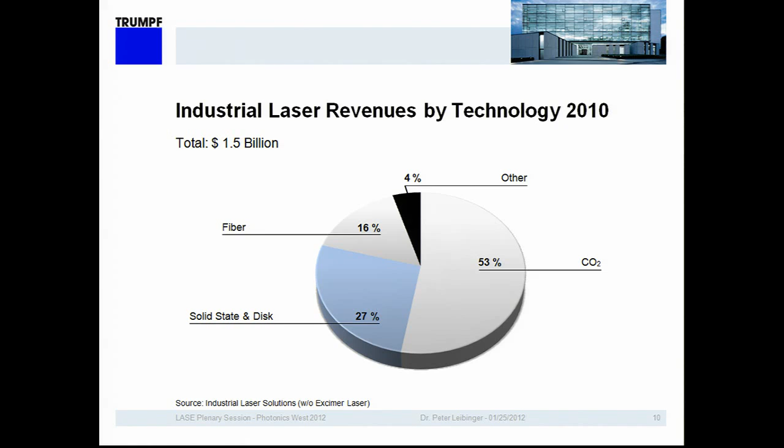In these clusters, semi, micro, and other, we find applications like thin film solar cell scribing, wafer cutting, matrix lead frame cutting, microlithography, cutting of hardened glass, stent cutting, to name just a few.

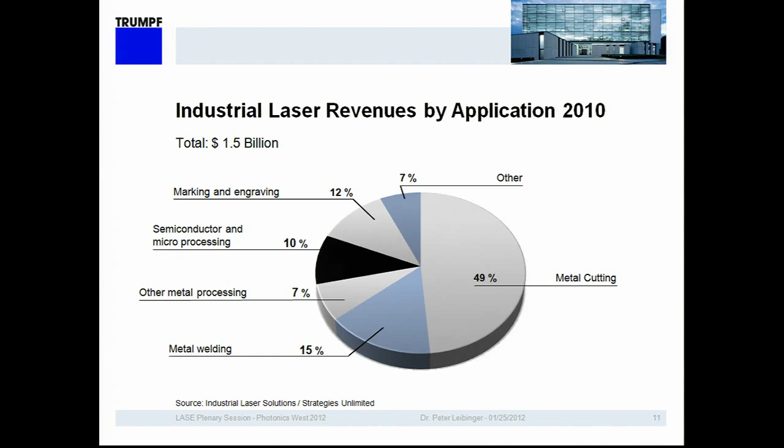Each of these applications demands its own laser source with vastly different specifications and application development. I've tried to cluster a few of those applications to give examples of the parts being made, to generate a better understanding of the breadth of the applications I'm talking about.

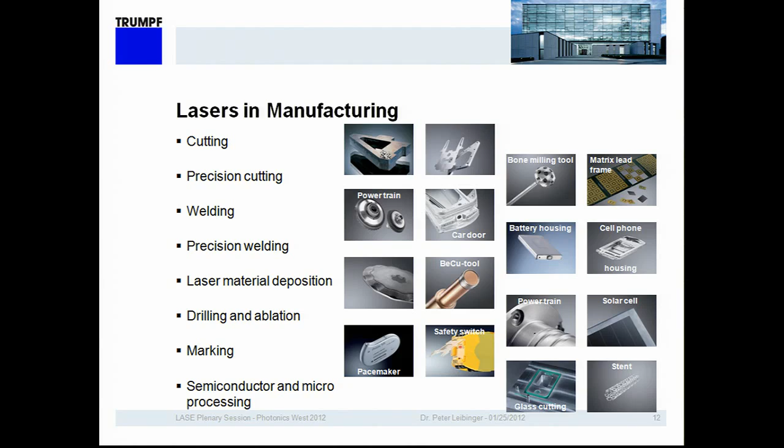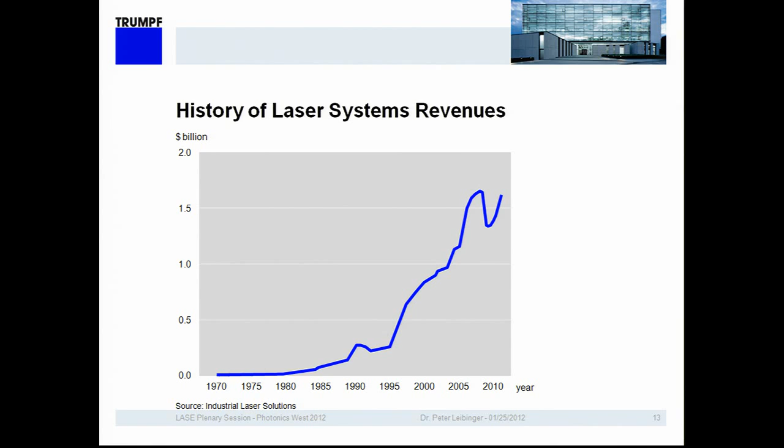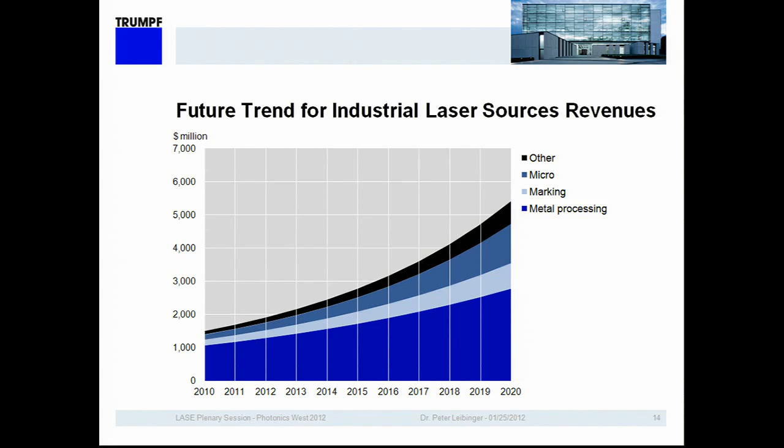However, the major growth driver of the past, which was laser cutting, probably will not be in that role in the future. I think that micro applications, or other applications, will get into the role of being the growth driver, simply because there are new laser sources available today that were not available in the past, and they are driving new applications.

From the aforementioned breadth of applications addressed by industrial lasers derives a set of necessary laser characteristics. I have clustered these and named them capability, reliability, and cost. Capability, such as laser power, beam quality, wavelength, pulse length, and pulse shape, have to be delivered reliably to ensure productivity and robustness of the systems and the process itself. Thirdly, costs such as investment, running cost, and the ability to integrate the laser source into a laser system play an important role.

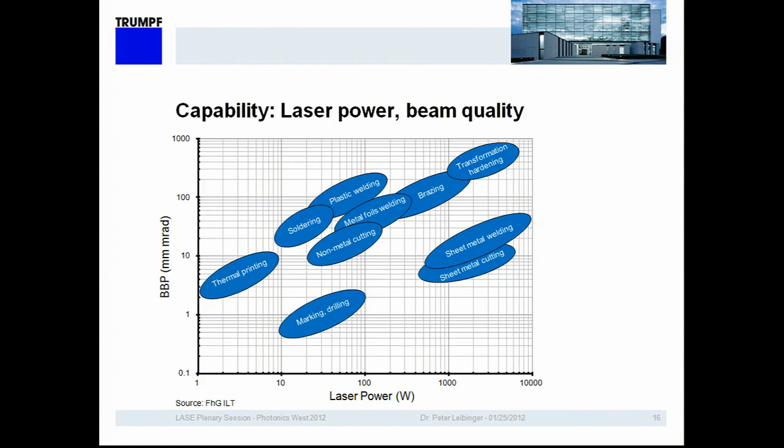Currently, there's a heated debate going on in the market about whether 1 micron or 10 micron wavelength is more suitable for cutting metals. In other words, whether the CO2 laser or the diode pumped laser can do a better job. Looking at the impact of the wavelength more closely, it becomes obvious that this laser attribute does have a major impact on the application itself.

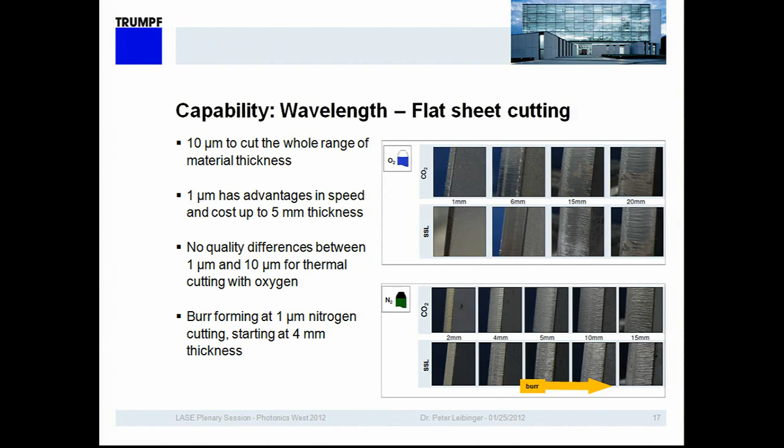We're seeing that on one hand, going to the shorter wavelength, the productivity of the process increases in light gauge material. However, the flexibility and robustness of the process with the shorter wavelength is worse, because you are no longer able to cut thick material in a burr-free way. Comparing the two wavelengths in stainless steel, this can easily be seen.

Cost is another characteristic we need to consider in this example. The running cost of the diode pumped laser is theoretically lower because of its higher efficiency. However, the investment for an equivalent CO2 laser is substantially lower, with CO2 lasers today reaching $30 per watt of laser power, which is much less than a comparable diode pumped laser.

Obviously, with this example, the answer that one single technology can do the job is no.

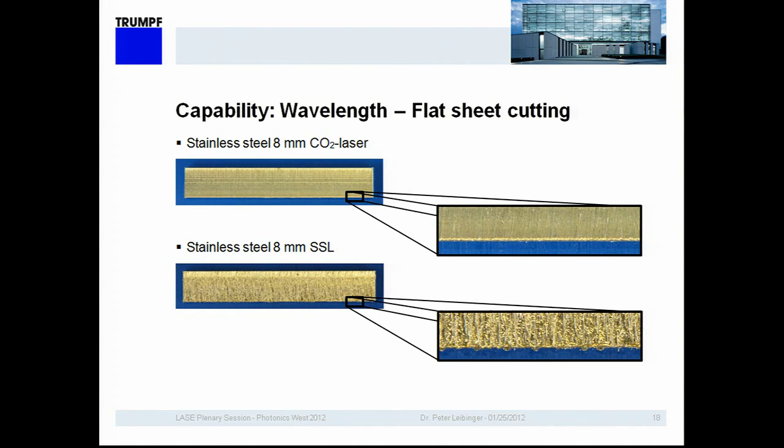Using the same approach, looking at another application, the question of pulse length can be discussed. An important application in the automotive industry is the drilling of very fine holes that have to be extremely accurate in metals, for the manufacture of fuel injection systems.

There have been attempts to use nanosecond lasers to do this, however the results were not satisfactory. For years, the holy grail of this application seemed to be femtosecond lasers. However, they lacked power and were too expensive to be deployed in the automotive industry.

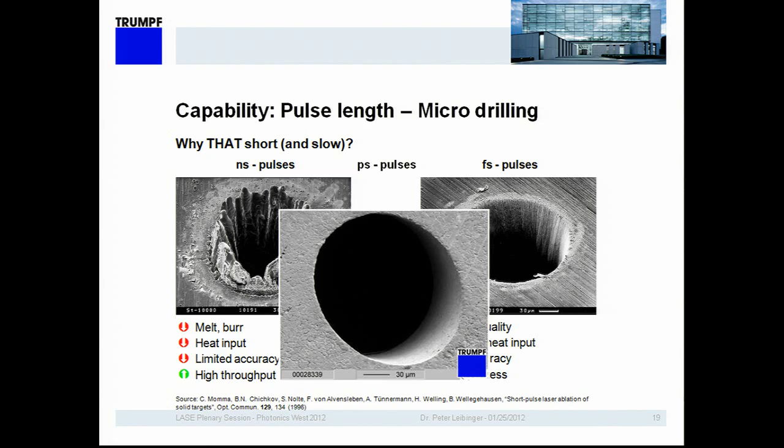The solution finally came with the introduction of very high average power diode pumped picosecond lasers based on the thin disk technology. A sweet spot was found for the application where good edge quality, high productivity, and relatively low cost for the laser beam source was available. So in this case, yet another basic technology, the thin disk laser, was necessary to achieve the goal.

Getting back to the question of required laser characteristics, I would like to briefly discuss reliability. Reliability, of course, is a function of the robustness of the laser concept, which depends on the complexity of the laser system and the technology readiness level of the subsystems that make up the laser system. Regardless of the above, the serviceability of the system is very important. No technical system is infinitely reliable, which makes the serviceability designed into the laser vital.

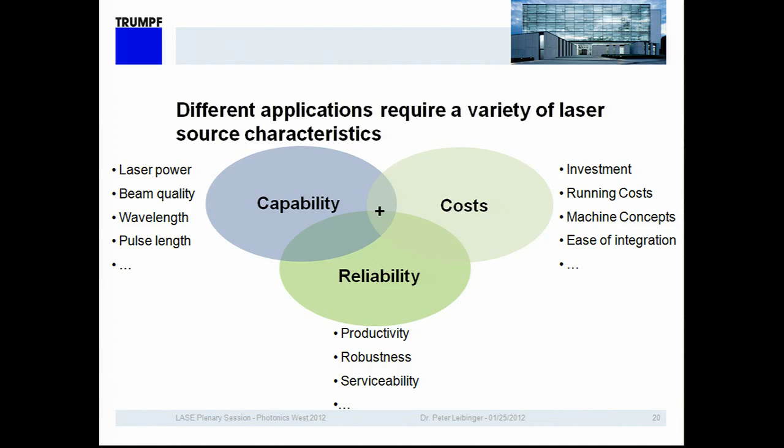Reliability and robustness are inversely linked to cost. This reciprocity is easy to understand with an example: a laser going into space on a satellite to analyze the atmosphere will have higher reliability cost built into it than a laser marking keypads that sits next to hundreds of similar lasers. Reliability and robustness are relative because they depend on the environment the laser operates in.

I have some examples of environments on the slide. A laser used for wafer scribing in a clean room of a semiconductor fab will have a different reliability requirement than one used for butt welding of coils in a steel rolling plant. It becomes obvious that it is unlikely a single technology platform is suited to serve all applications.

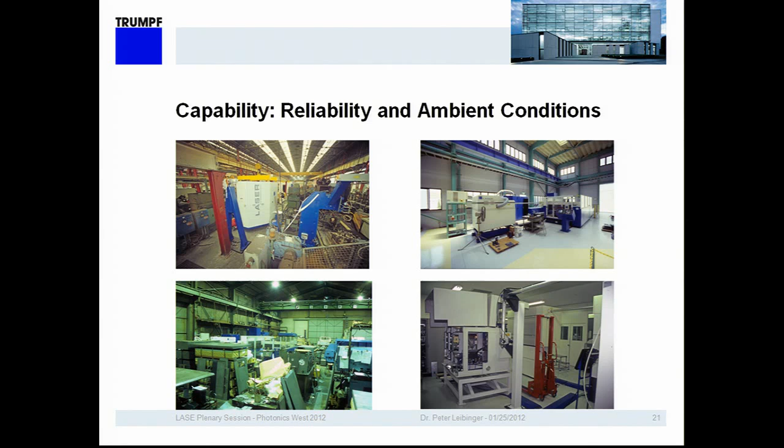One of the most important factors I still have to discuss is the question of cost. In cost per watt of laser power delivered, we've had a dramatic development over the past years, driven by laser diodes becoming vastly more powerful, and as a result diode-pumped solid-state lasers, be it fiber or disc, have seen dramatic cost reduction.

We've experienced something comparable to Moore's law in the last 10 years regarding the cost for available laser power out of diode-pumped lasers. I don't expect this to continue at the same pace, simply because only about 30% of the cost of a diode-pumped laser is made up from the cost of the diodes themselves. The cost erosion must therefore slow down.

Nevertheless, this development has enabled the diode-pumped laser to compete in applications such as metal cutting, where it could not compete before. Still, I don't believe this cost development will lead to the dominance of one technology, the diode-pumped laser, for the reasons I mentioned above.

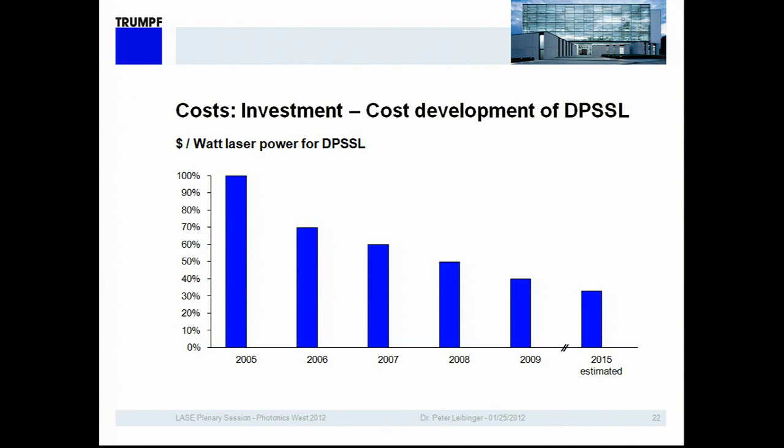So if it's not possible to address many applications as a laser manufacturer with one type of laser, would it make sense to instead cherry-pick applications and focus on a few only, to limit the span of technologies one has to manage? It could be best for a laser manufacturer to focus on individual applications.

When defining the strategy for my company on this question, we found three reasons that speak against the strategy of only addressing individual applications. First...

I think addressing many applications with different platforms leads to cross-fertilization and new business opportunities. Developing industrial laser applications broadly and simultaneously in areas such as cutting, welding, marking, engraving, etc., leads to a much broader understanding of laser applications in general in materials processing, and thereby a more fundamental understanding of the individual application in question.

Secondly, the question of economies of scale plays a role. Focusing only on an individual application will lead to problems of economies of scale, because you cannot then do it globally. Most laser applications are relatively small niches that do not support a worldwide operation.

Thirdly, we've observed that in many cases customers don't only have one application but many, and it's better for the laser supplier to be able to offer many solutions to the same customer. It strengthens the customer-vendor relationship. Clearly, for my company, the answer to this question, does it make sense to focus, is no.

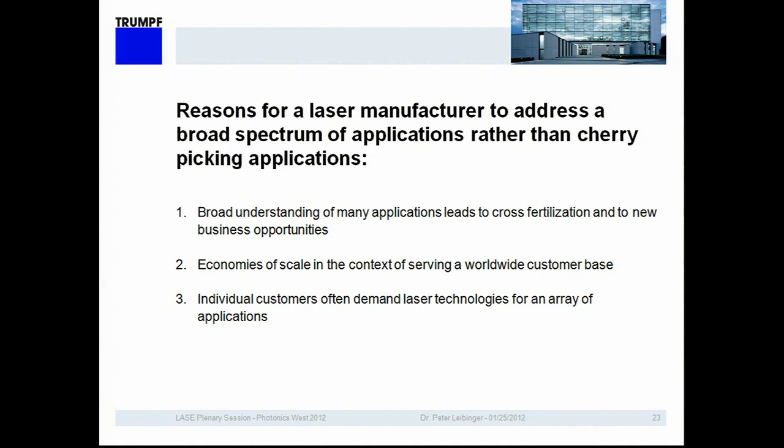So if it's our desire to offer lasers that address many applications, while at the same time limiting our R&D spending, how do we do it? At the beginning of an R&D project for a new laser for a new application, we try to determine which technology to base this on. To achieve this, we go through a list of criteria.

Obviously, the first question is: can the platform we choose achieve the specs we need? The second question might be more important: is the scalability of the platform with respect to the most important single specification, for instance output power, given? Third is the question of the complexity of the system. Fourth, the question of robustness and serviceability, and so on.

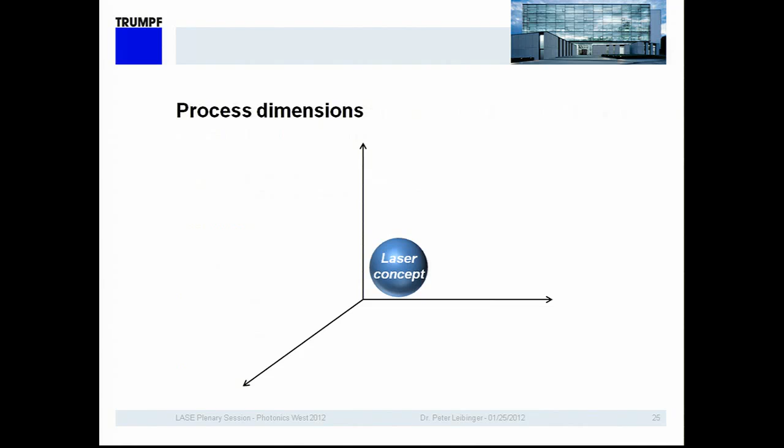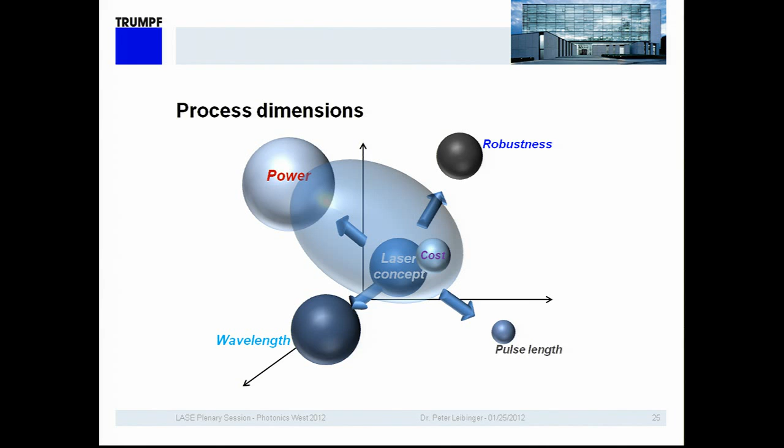In my mind, the question of scalability regarding one or two of the most important specifications is imperative, because it leads to the effect that a few laser technology platforms will be able to serve many applications. If applied well, this concept leads to an optimal relationship between R&D spending and the breadth of applications we can serve. With a few scalable laser platforms, many applications can be addressed.

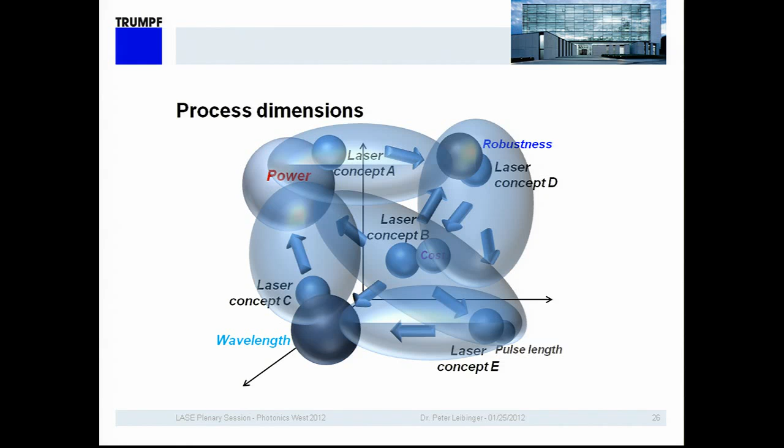2 examples of scalable laser technologies, and this will surprise you or maybe not, are in my mind the CO2 laser and the disc laser. In the case of the CO2 laser, the scaling capabilities that I want to mention are power and the ability to produce very short and very powerful pulses. Originally, the CO2 laser, the fast flow CO2 laser, was developed to be a powerful and reliable

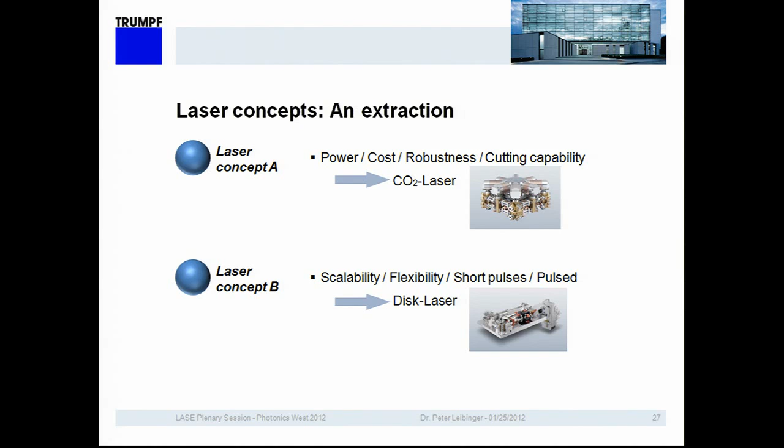and low-cost laser platform with ideal properties for laser cutting of metals. In the past years, our company, TRUMPF, has expanded this laser technology as a technology platform to be suitable as a pump for EUV light sources.

The technology for the EUV light sources was developed together with Cymer in San Diego and ASML in Holland. And we are now beginning to deploy these types of EUV sources based on the CO2 laser at all major semiconductor manufacturers worldwide.

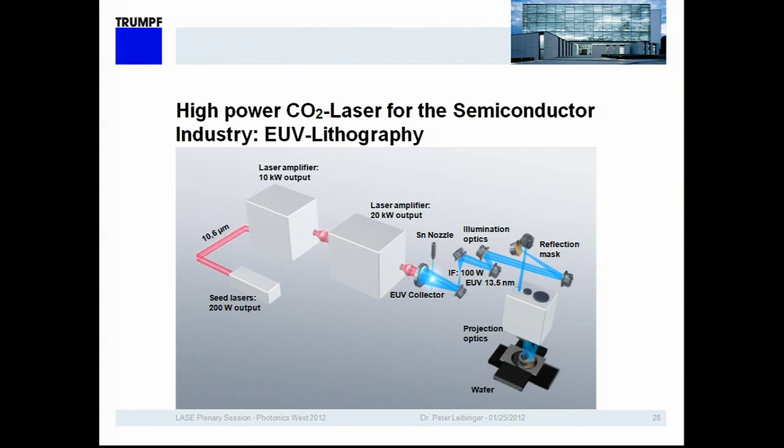So the scalability of the CO2 laser in this case allowed us to enter entirely new fields. Next example, disc laser, which was developed by us as we felt an ideal laser for industrial applications where high power and good beam quality at a low cost and high reliability was needed. The result, of course, is the most successful high-power welding laser worldwide.

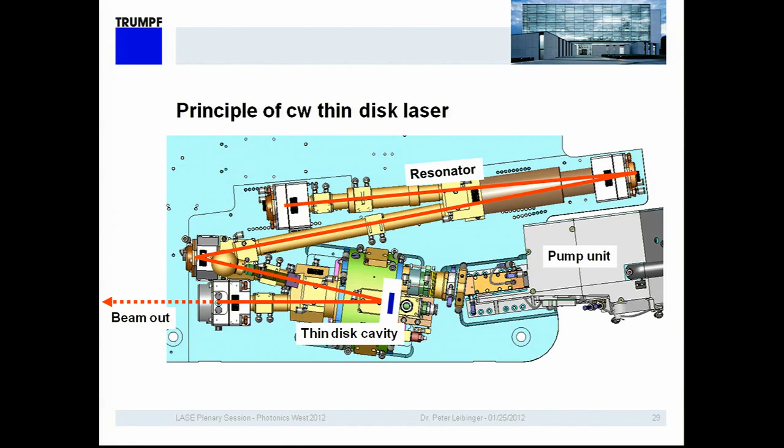The interesting thing, of course, again, is the question of the scalability of this platform. The scalability is now taking place, or the scaling is now taking place in several dimensions. One, beam quality. We are, at this point, deploying high beam quality disc lasers as cutting lasers worldwide for metal cutting applications and have achieved a market share worldwide of approximately 30% in this technology.

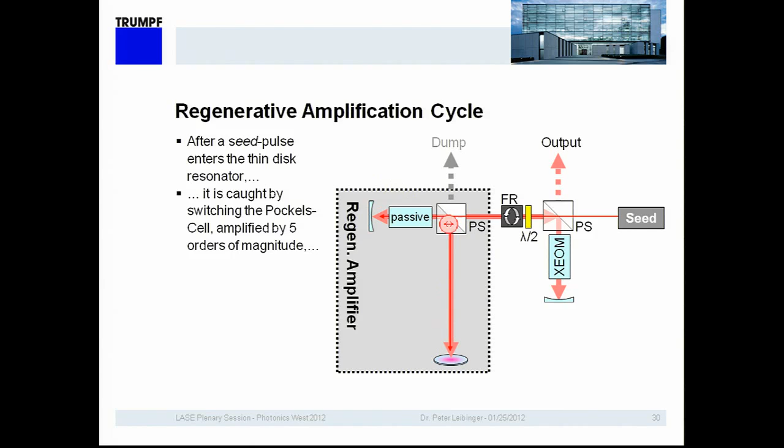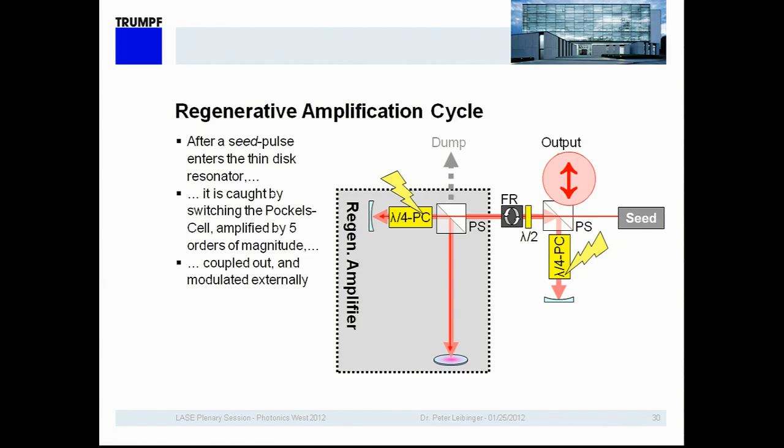At the same time, the scaling of this technology platform is taking place in an entirely different direction, in the direction of picosecond lasers. Based on the thin disk platform, we are realizing picosecond lasers at high power using the principle of regenerative amplification. And thirdly, we're scaling this technology platform for the use as nanosecond lasers of very high power of several kilowatts by using the principle of cavity dumping.

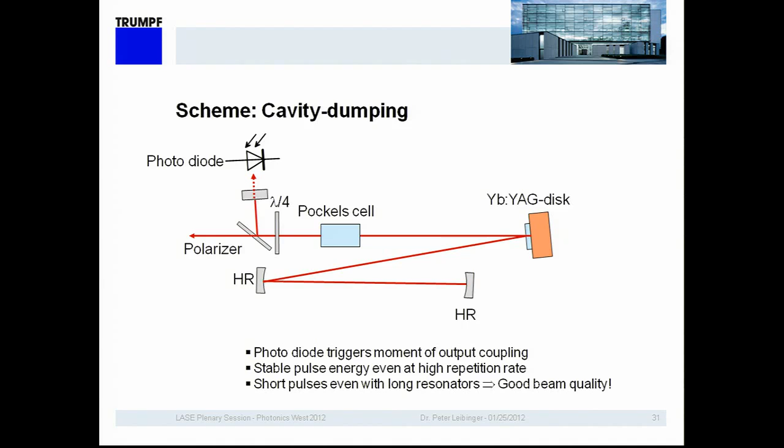But the good news is that a successful strategy exists. The strategy is to identify scalable laser technology platforms and to focus on them in an approach where as few as possible of them are used to cover as many applications as possible.

Amongst these, as I mentioned, in my mind, is the thin disk technology, where we have a platform that allows very high optical power, output power, at high reliability, at low requirements regarding the brightness of the pumps, and thereby low cost of the system.

Second platform, of course, is the fiber laser with its unique attribute of monolithic design on one hand and its ability to simply produce fundamental mode light and its power scalability. I think it's the ideal platform for applications where either fundamental mode light is necessary or where compactness at high power is needed.

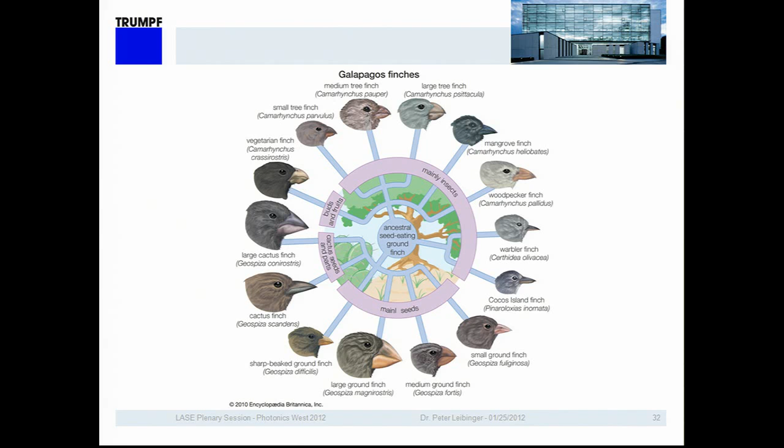And lastly, in a company where different laser technology platforms are pursued, there is internal competition. And this is something that keeps you sharp and makes you better. So in conclusion, I'm happy about the result of my analysis because I think this way the world of industrial lasers will be a lot more interesting than if only one platform did it all. Thank you very much.